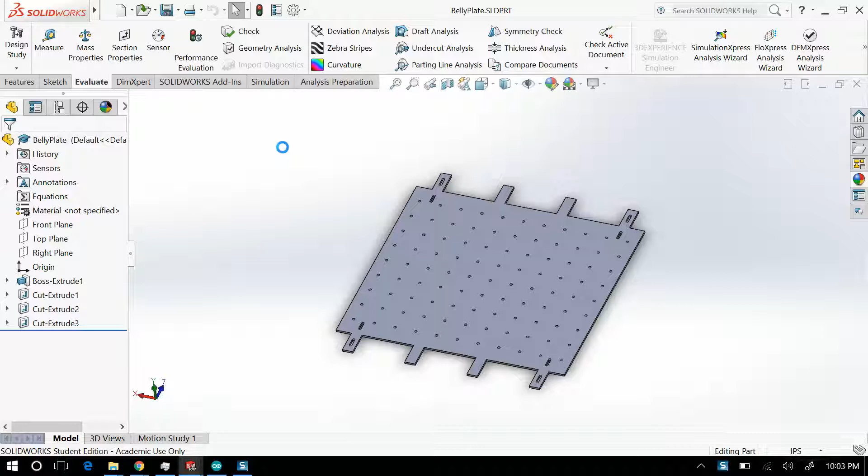Okay, so I'm going to go through this a lot quicker than I've done before, so you can just take a look at the dimensions you need. If I go to my main assembly, you can see here is my robot that we want it to kind of look like at the end of the day. There will be other pieces put on the robot, but that will be much later.

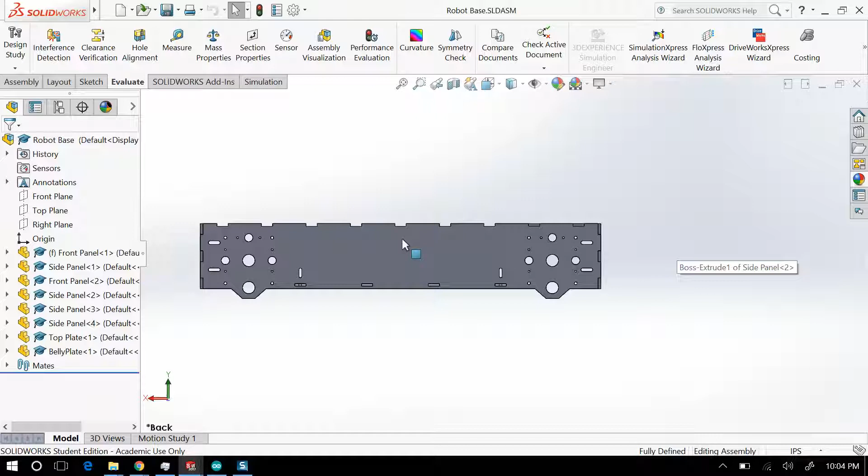So let's get to making the belly plate as well as finishing off the side plate. You'll notice there are a few extra holes on the side plate that I need to put on, as well as some of these holes for the belly plate.

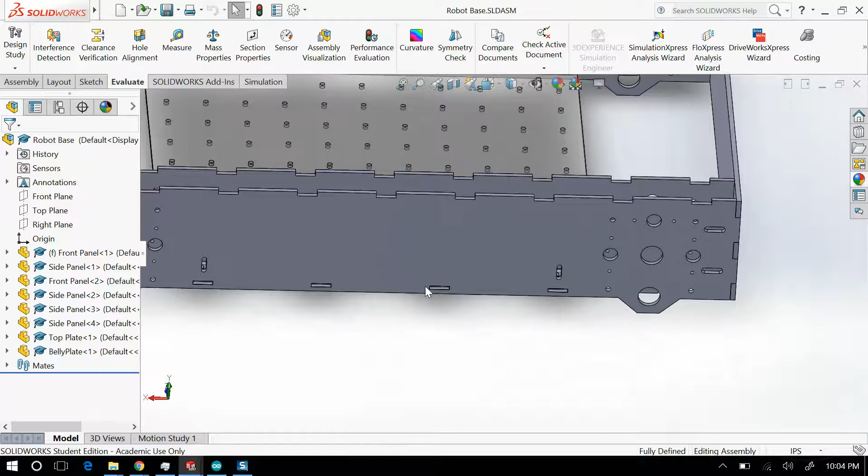Okay, if I take a look here, you can adjust this to be the way you want it to be if you need to, but you can see that I've created slots along the bottom of my robot to put my belly plate in, as well as slots for my L brackets after putting the belly plate in. So let's get to making these slots.

So I'm going to go into this part here, and there are two things that are different with this side plate now. One is the addition of these slots for the belly plate, as well as these slots for the L brackets, but also you can see there are these sets of 4 holes on each side, and these are for churros to hold our gearbox together and make it sound a little bit nicer. Previous iterations of this robot in other classes made it sound like a pile of rocks, so we want ours to sound a little nicer than a bag of rocks.

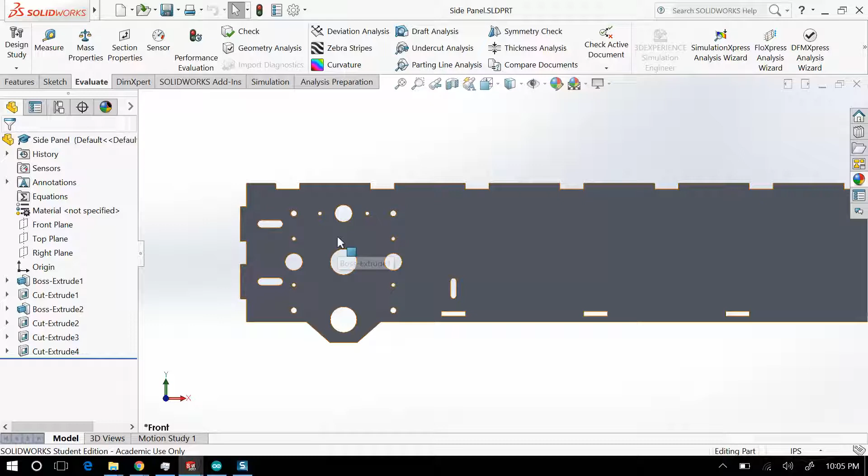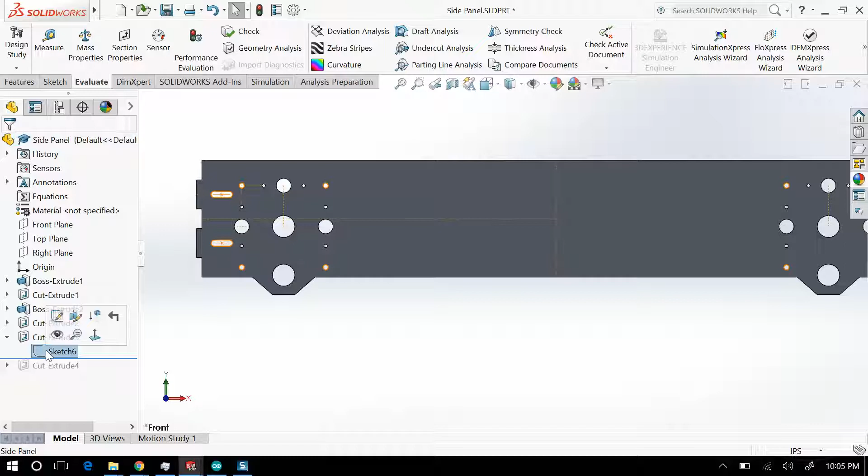So let me take a look at this extrusion here. What I'm going to do is go back here. Let's say this was your side plate before you made these extra cuts. I'm going to show you this cut that we made, and go into the sketch to give you an idea of how this sketch looks. Basically what I did is I created these 2 slots here that are right next to my teeth.

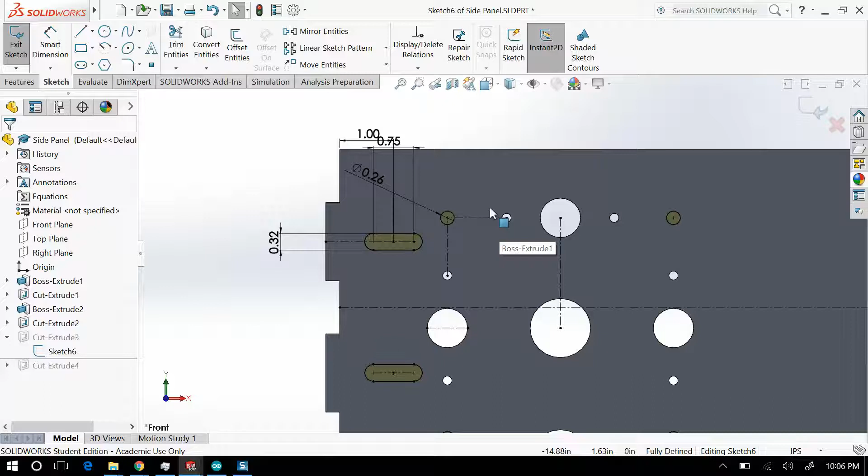I think you already had these. This is 1 inch away from the inner side here, 0.75 inches in width, as well as 0.32 inches in thickness. What you care about are these holes here, and what I've done is I created a center line here and a center line right there for reflection, as well as a center line of these 2 lines that intersected to tell me where I'm going to put my churro.

So for instance, if I deleted these 2 lines here, delete 1, delete 2, you can see that I can move this hole all about, and all the other holes similarly move about with them.

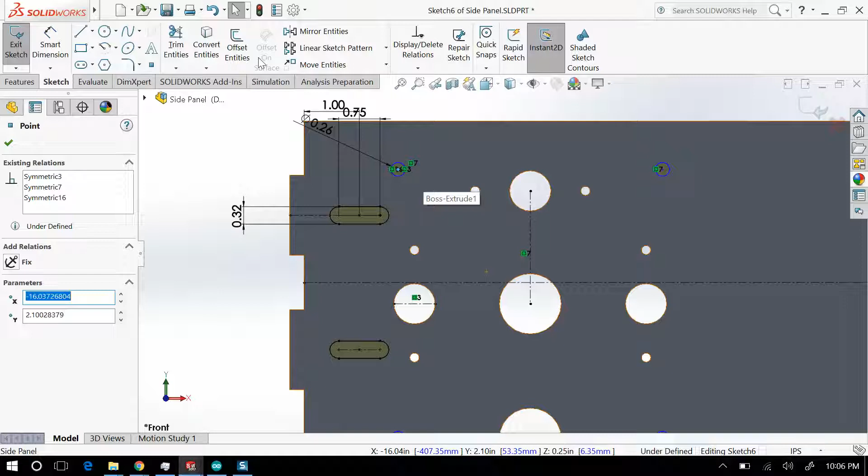So what I'm going to do is create a center line from this point outwards, make sure it's straight. I'll also create a center line from this point outwards, straight to there. Just for posterity, I'm going to bring this point back right there so it's locked on top of each other. Now you can see this point is exactly where the horizontal line from this hole and the vertical line from this hole meet, and that's where I'm going to put this churro hole.

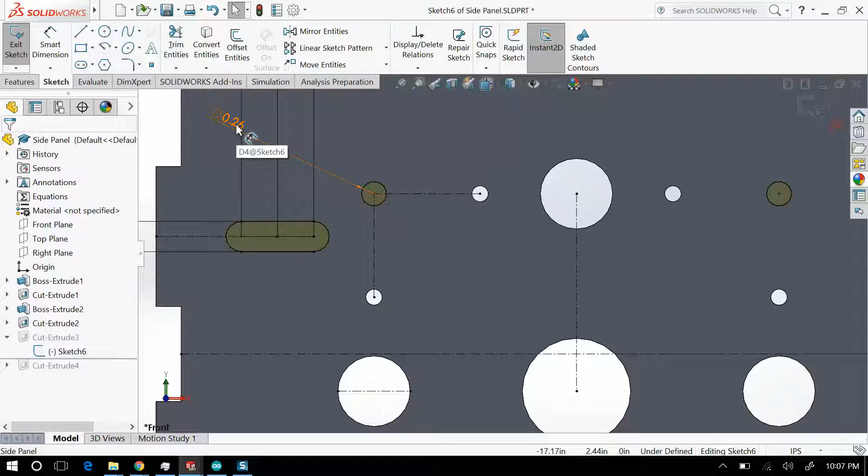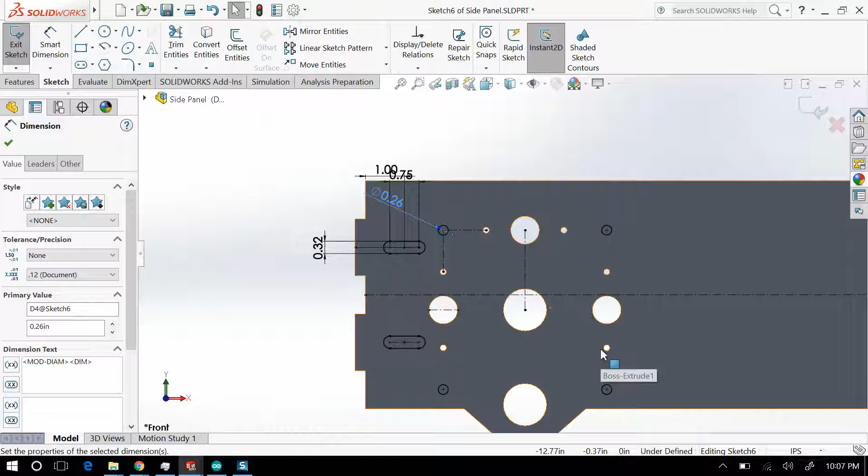This churro hole is exactly a quarter of an inch in diameter, and we're going to add an extra hundredth of an inch, so 0.26 inches in diameter. I then reflected across this line here, as well as this line here, to give me these 4 holes. Then I took all of these 4 holes and reflected across this line here, and so I've created these 4 churro holes.

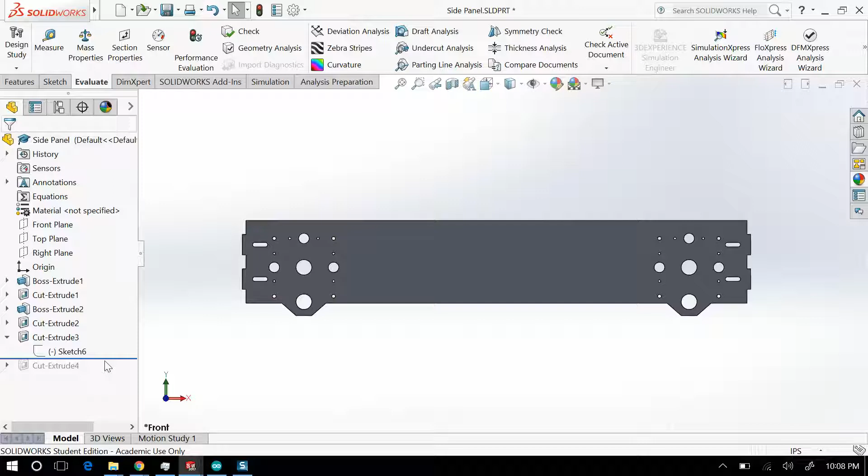So I'm just going to exit the sketch, and it will re-extrude them, and now you can see I've created these holes. Now, for the other holes, I'll go into the sketch for these ones and show you the dimensions.

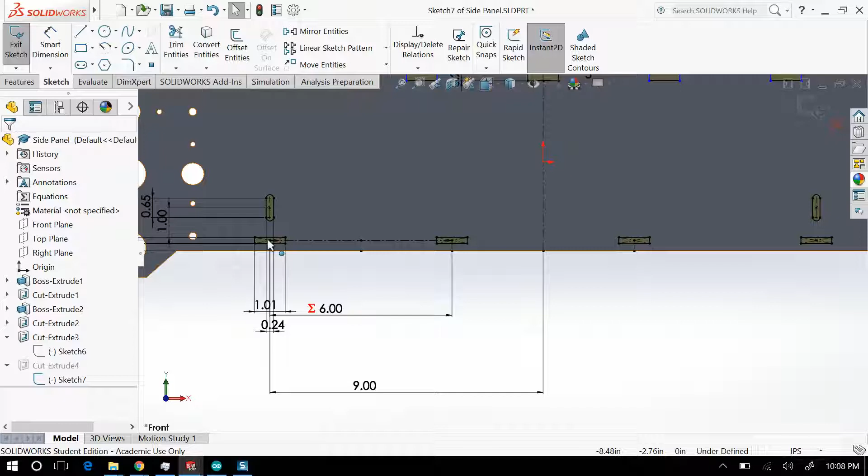What I did is I made this in the same sketch as the tabs on the top, or these slots on the top, and for the bottom I started one slot exactly 9 inches from the center line. I made it 1.01 inches wide and 5.2 millimeters thick, because we're going to be using 5 millimeter polycarb.

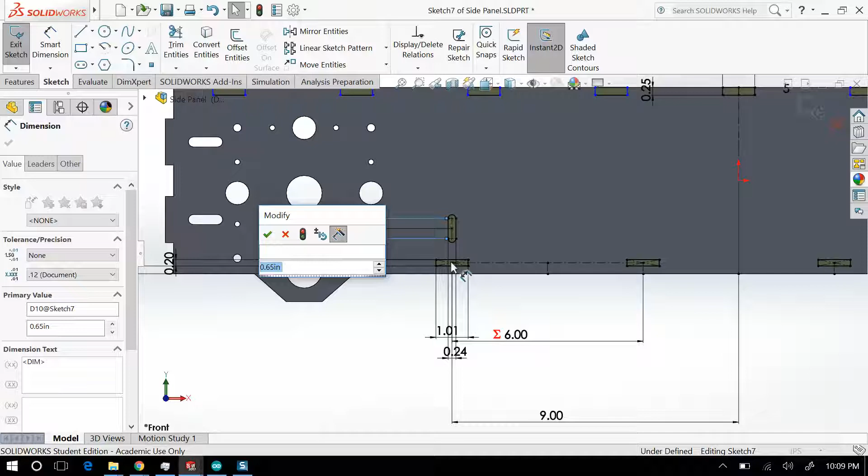And then I did a linear sketch pattern along this direction by 6 inches each. And then I also put a slot, just like I've done before, where I made it an inch away. That shouldn't be 0.65, that should be 0.75 inches, and I made it 6 millimeters across, or 0.24 inches across.

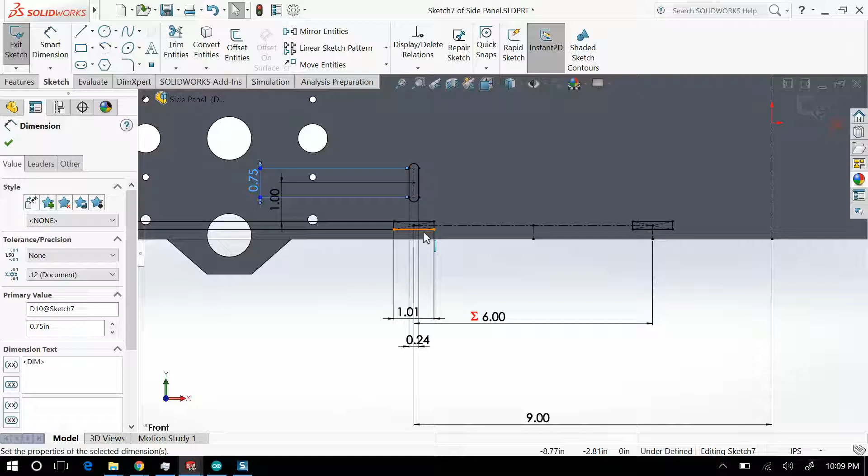And then I reflected it across this line. Notice how I'm not putting slots in the center area, so that I can leave more room for weight relief. Similarly, these slots here, I didn't put them right on the bottom because I want the ability for gravity to be fought by the thickness of this metal here. So I gave an extra quarter inch from the bottom to where my rectangle begins.

Okay, so those are the dimensions that you have to care about. So I'm just going to click OK with that and exit the sketch. And so this is my side plate.

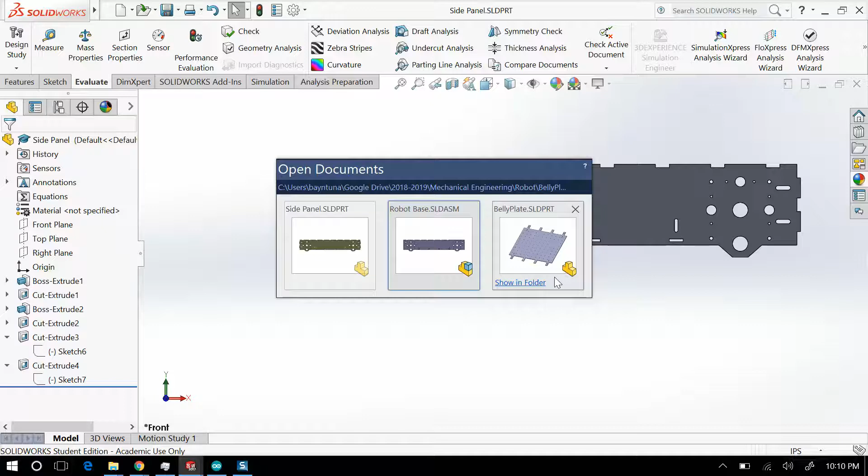All right, I'm going to go on to the belly plate. So we can go ahead and create a new file if you haven't already, or if you have created a belly plate, open it up, and I'm going to just kind of start at the beginning.

The beginning of the belly plate that I started with, again, you can make this whatever you want, but I made it 24 inches wide. The reason is that is the total width of our robot, which is 2 feet wide. I made it 22 inches in length, and you'll see why later. You could make it longer, but you're going to have to put some extra cutouts for other purposes later on. So let me move forward.

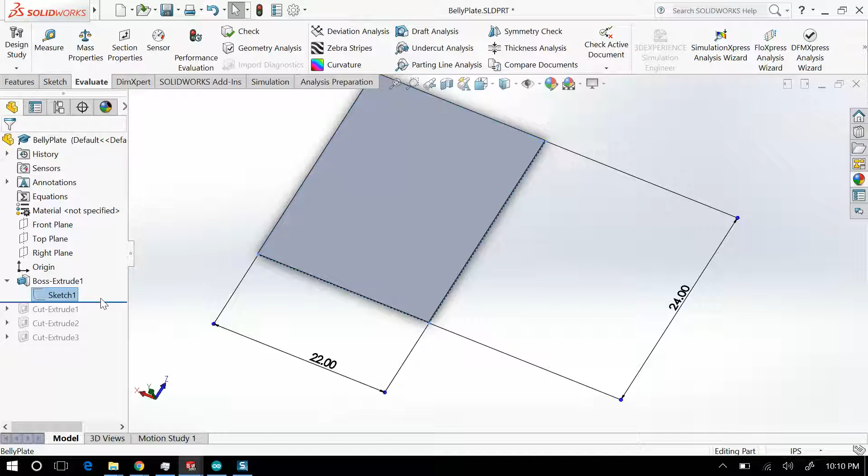After I made this rectangle, I extruded it by 5 millimeters. So that's over here, it says 0.20 inches, but it's really just 5 millimeters.

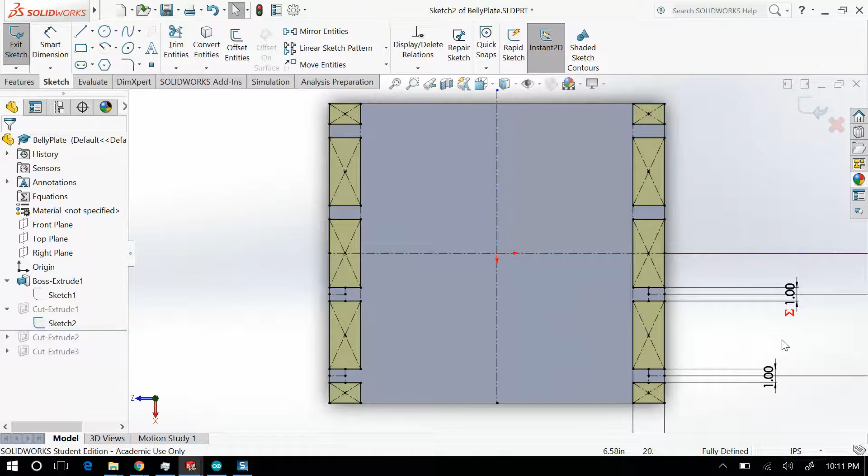Let me roll this forward. Then what I did is I made cutouts to create these little tabs that came out. Let me give you an explanation on the size of these tabs. The width of these tabs is exactly 1 inch.

And the width between the tabs, essentially I made boxes, and I didn't really care about the size of the boxes. I just made sure that the width of the tabs were 1 inch, and the distance between the center and the last tab was 9 inches. That's what we had before, and the distance between the center and this middle tab here is 3 inches. That's what I did here.

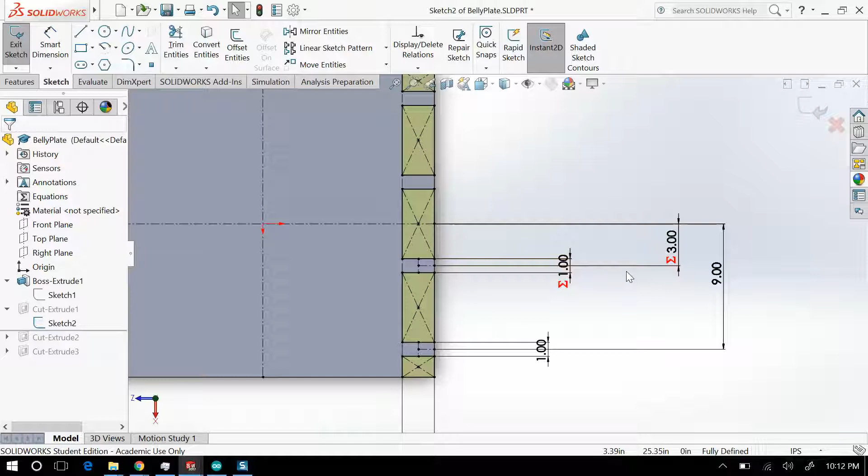But you can do this in whatever way you want if you go back to your previous sketch of the distance between those slots that you created. And then I just basically mirrored all of this through these two center lines here and here, and that's what created my extruded cut here.

So the depth of the tabs is 2.25 inches. The width of them is 1 inch, and this distance here to here, if I remember correctly, I think it's 6 inches between each tab.

6 inches between each tab, and 3 inches from the center of the plate to the center of this tab, and 9 inches from the center of this plate to the center of this tab. So you can define it however you want, as long as you make sure you get these dimensions right on your actual robot.

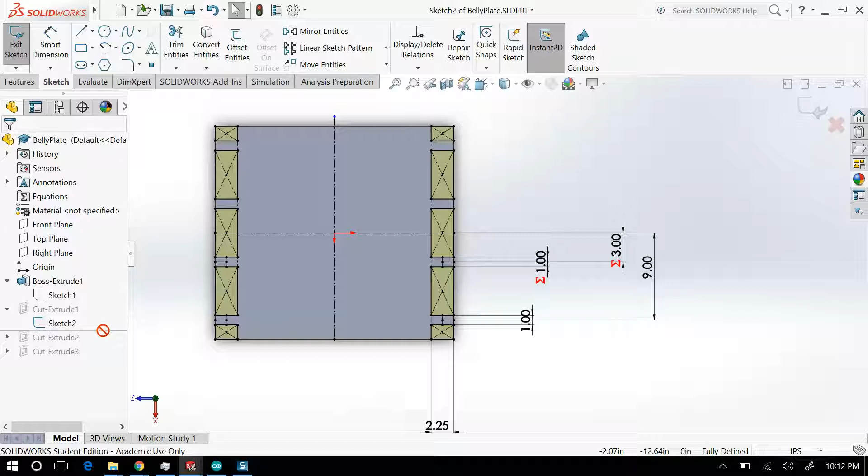Okay, so I'm going to now roll this forward a little bit more. I'm going to exit the sketch, and roll it forward to my next cut extrude. My next cut extrude are just these little slots here.

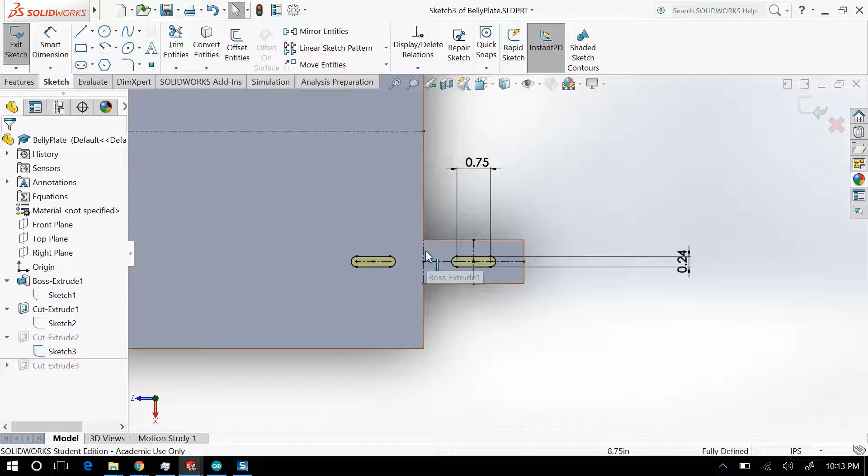Again, as I always do, these are 0.75 and 6.2 millimeters in width. The difference here is that I made this slot perfectly centered on the tab instead, as well as then reflected it across the center line here. And then I did another reflection across this line for that tab, and did all of these tabs and reflected across this line for the tabs up here.

Okay, so you can copy these tabs and put them into your extrusion.

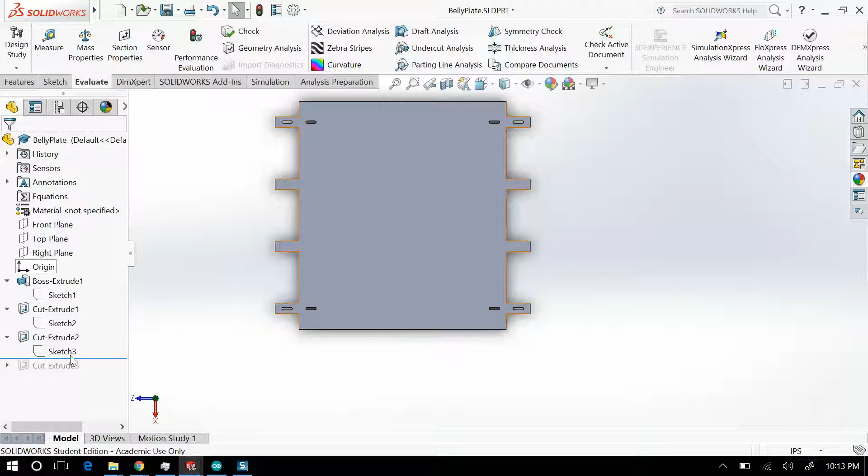Finally, what we need is a bolt pattern in order to actually put things into this plate. This can be made of anything really, it can be made of aluminum if you want, but I like to make it out of polycarb just because it looks a little bit nicer.

And so I'm going to go into this sketch and show you how I did that. This is probably the simplest thing you could do. I basically created a 6.2 millimeter hole right here, smack dab in the center. I used two center lines to find out where the center is.

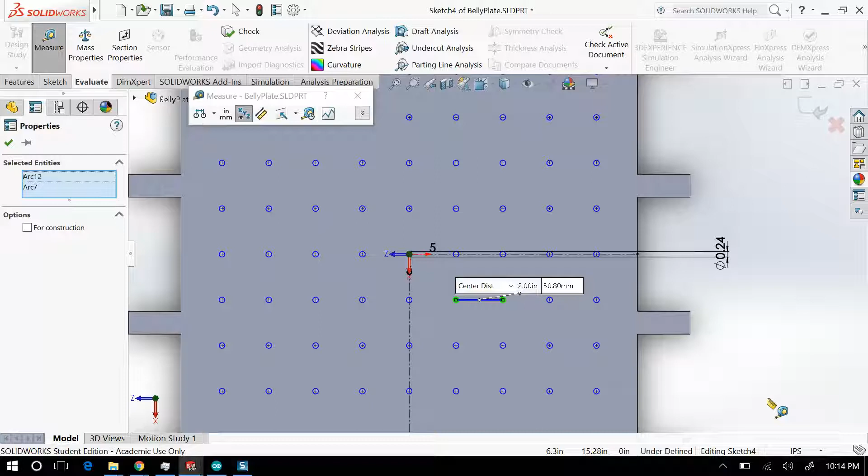All I did is a linear sketch pattern in this direction, and in the down-right direction, then a reflection across this line and a reflection across this line. If you take a look, I'll show you the measurement between each hole - in my case it's 2 inches. You can make it 1 inch, but I'd prefer 2 inches because you don't really need a 1 inch hole bolt pattern, that's probably too much. If you already made a 1 inch pattern and want to change it, go ahead. If not, it's probably okay, as long as you make this out of polycarb, because the cut won't take too long. Okay, so that's it.

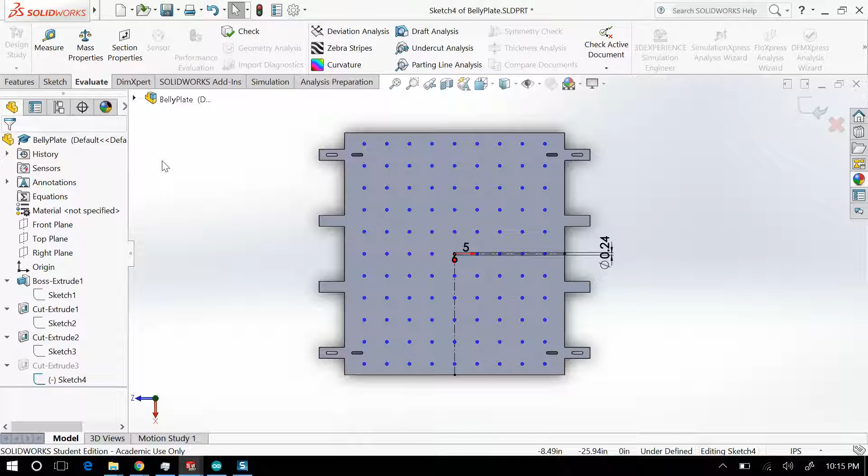That's it for the belly plate. Once you import this into your main assembly, you'll basically have a fully functioning robot that kind of looks like mine. Over here, hopefully yours looks a lot better than this.

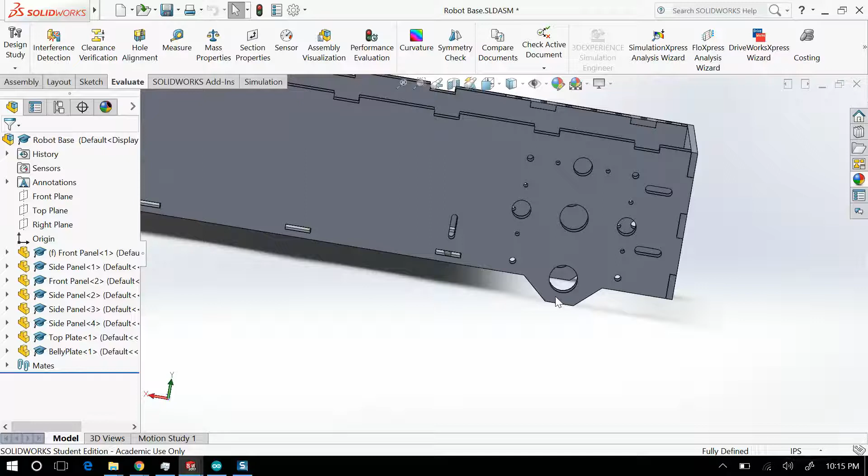There's a couple of aesthetically pleasing things I'd like you to try and do. The first thing is to fillet the edges - there's a few edges of this robot that could use some filleting. For instance, this piece here, let me open this part. This piece could certainly use some filleting on this corner, this corner, this corner, this corner.

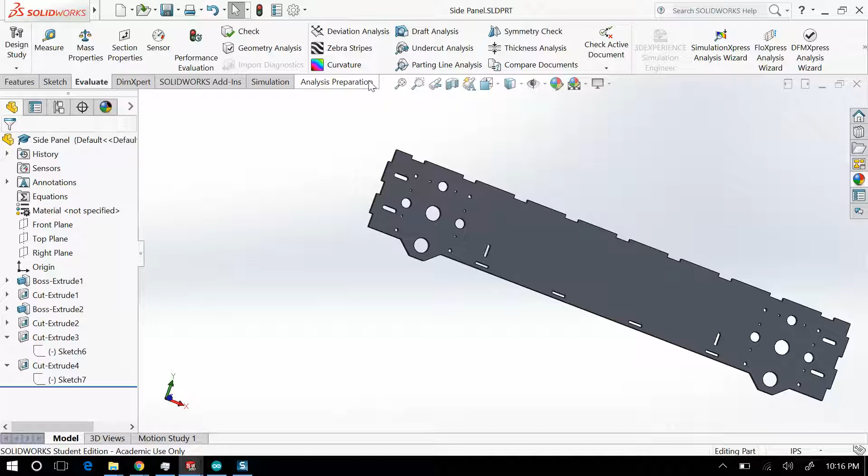What I'm going to do is go to Features, click on Fillet, then click on the part I want to fillet. I'm not going to move away after clicking it, because there's a bunch of things I can do. If I don't want to click on all of the corners that exist, I could click on one of these boxes. Unfortunately, clicking on any of these boxes is going to ruin your fillet, or your robot part, because it's filleting way too many corners. You don't want to actually fillet this many corners.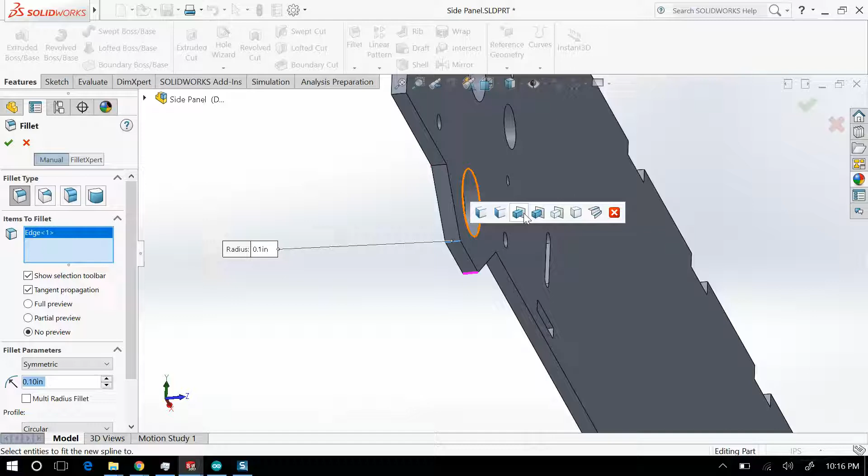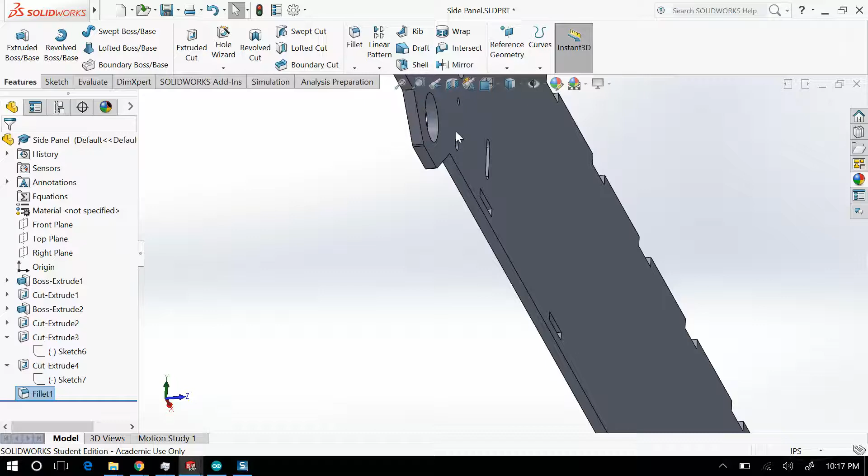What I want to do is make the fillets just internal to this particular feature, which is just this extruded portion here. If I press this again and select internal to feature, you'll see I only have 4 parts that are going to be filleted. So I'm just going to click that. My fillet radius, usually 2 millimeters, is probably good enough. I'll just press enter, and you can see it's created these nice rounded little edges.

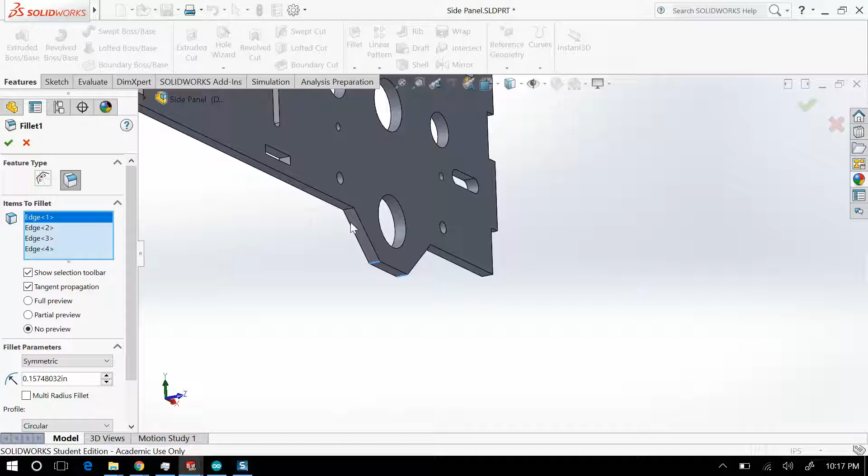If I want to, I can make it look really nice and edit the feature here, maybe change it to like 4 millimeters. And so now this has created a nice little portion here. I could have also edited the feature and clicked on this as well.

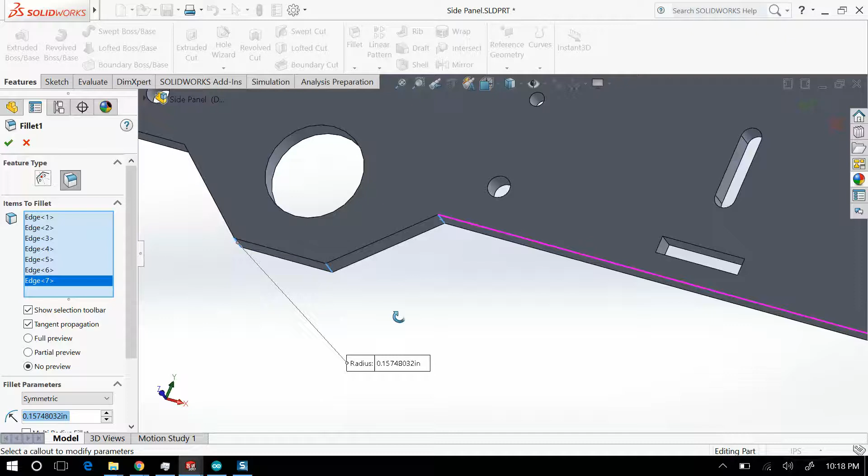Oh, this goes crazy - not connected to start face, connected to start loop. Nope, nope. Oh, concave - no, I don't want all concave either. I can just click on a few extra, click on that one as well, click on that one as well, and click on that one as well.

What I'm going to do is make this even nicer - I'm going to make this like 6 millimeters, 6 millimeter radius. You can see it's created these nice little rounded edges on here, and this is something you're not necessarily going to cut yourself on.

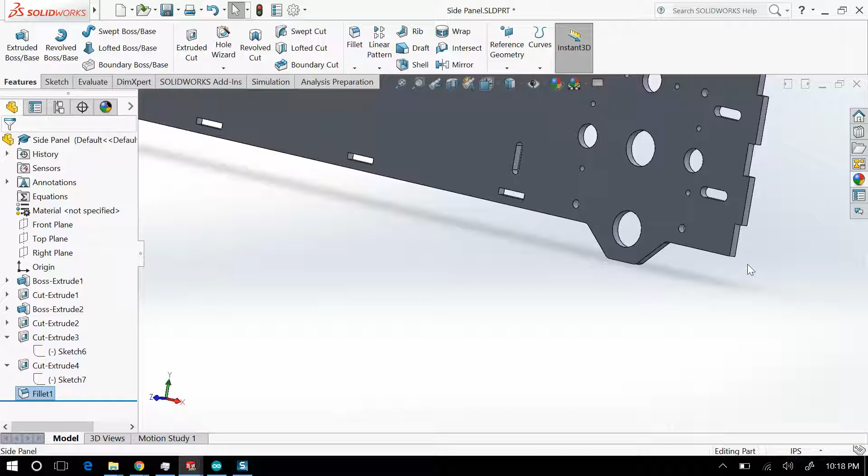You can also do a fillet on these tabs, but you can't do fillets internal to the tab. So if I wanted to do that, I could click on fillet. This is kind of a nice way to keep yourself from cutting yourself when you actually create this. So I don't want it connected to start face, and I don't want it connected to start loop. What I do want, though...

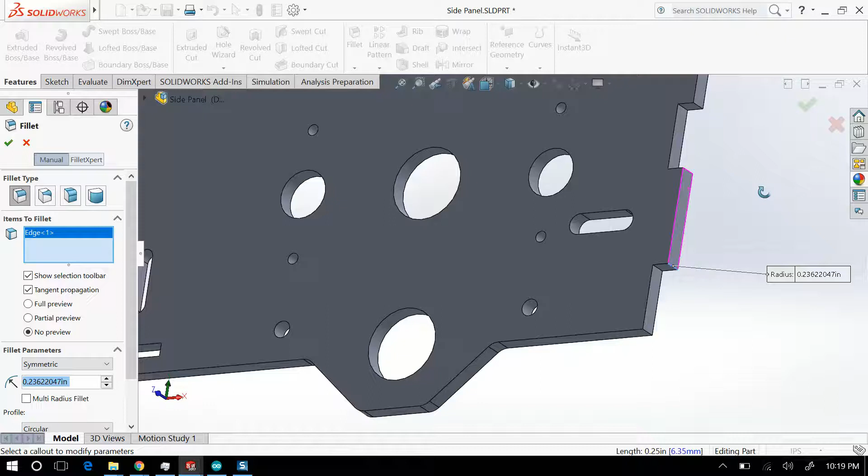Maybe I'll click on the next one. Hopefully it will tell me I want all convex. No, not all. No, not connected. Left feature, right feature. Nope, unfortunately it does not give me the option to do that.

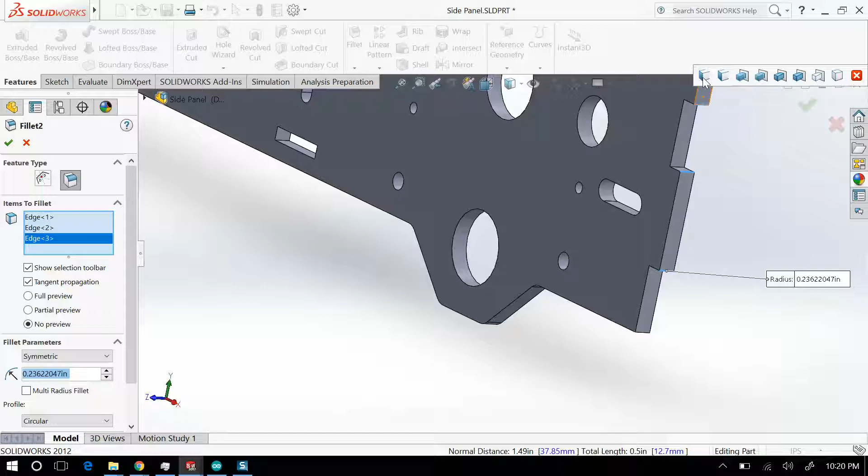I'm going to go back and click on this fillet, edit the feature, and hopefully click on another one, and it will allow me. It's just not allowing me to get any of the extra things.

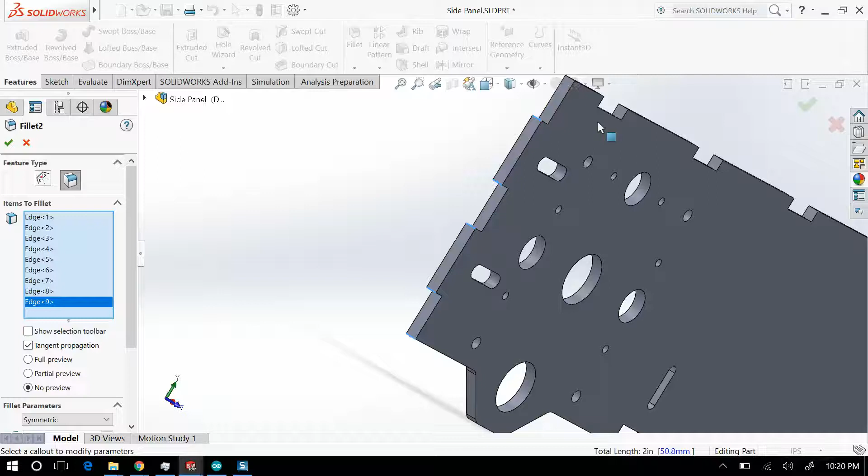So if I want to keep myself from cutting myself on things, I can fillet basically all of the convex edges - 1, 2, 3, 4, just keep going all along the top here, including these pieces up here. It gets really annoying, but it becomes worth it once you end up cutting this material. Otherwise you get really, really sharp corners, and you'll have to manually fillet them yourself, which takes on the order of about a half an hour per piece. Since you're going to have several of these pieces, you really don't want to do that - you really want the water jet cutter to do it for you.

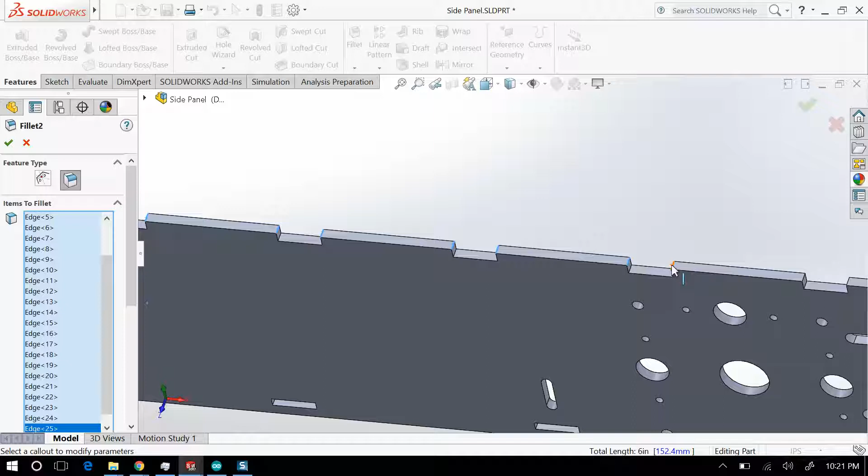So I'm just going to fillet, fillet, fillet. I think I've got them all. Oh, I don't have this bottom one here.

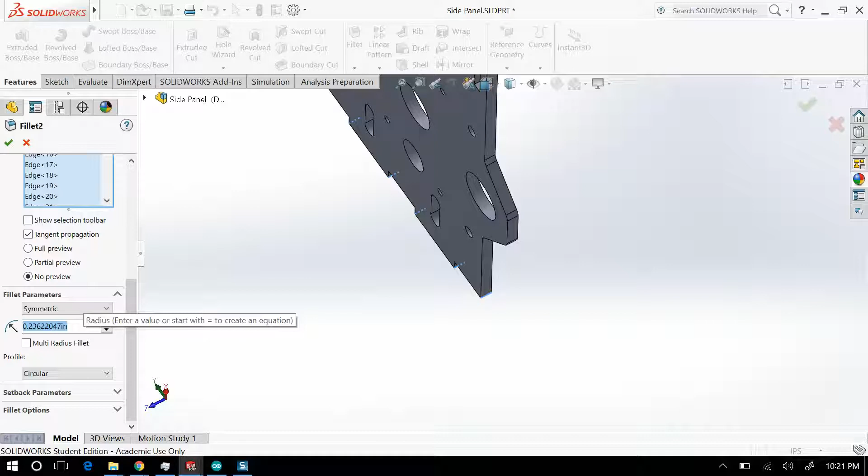And done. I filleted them way too much, so I'm going to change them to probably about 2 millimeters. You can see that I've basically made these nice rounded edges all across the top. That has made my robot way less sharp than it used to be.

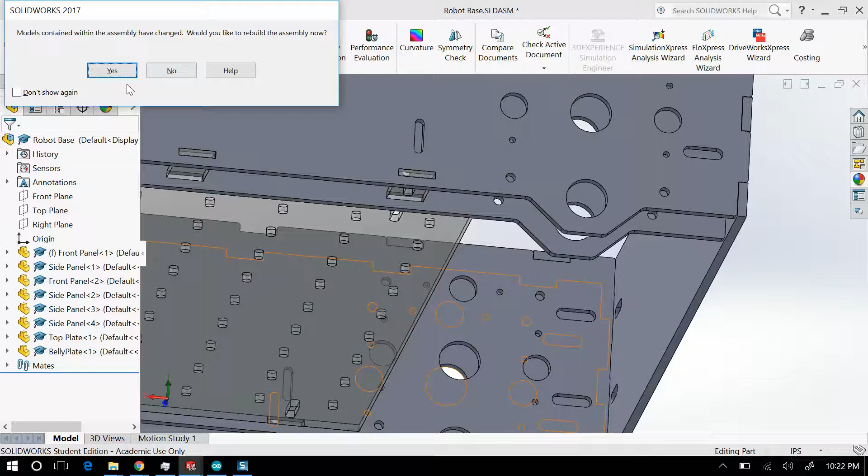So what I'm going to do next is show you how to make some relatively good looking weight relief. So I'm going to go back to my robot base, and I'm going to go to my front panel. And the reason why I'm doing that is because I have a little bit more space to work with on my front plate, and I don't have as much interference, as well as the fact that I need to also fillet my front plate. So let me go there.

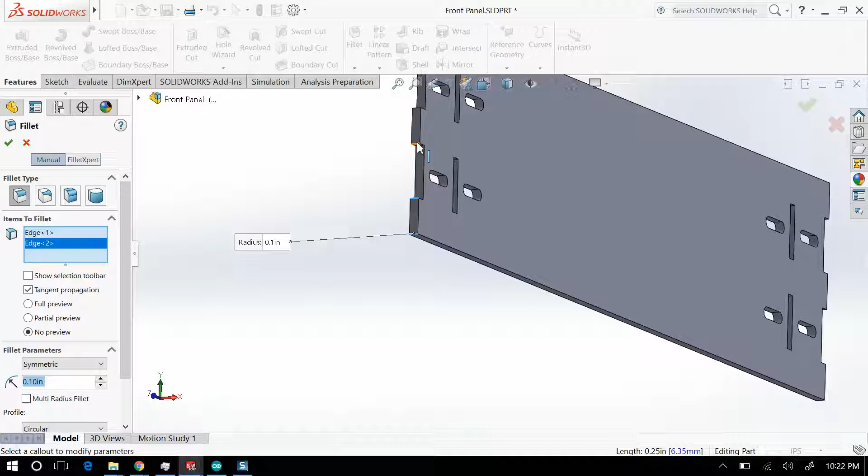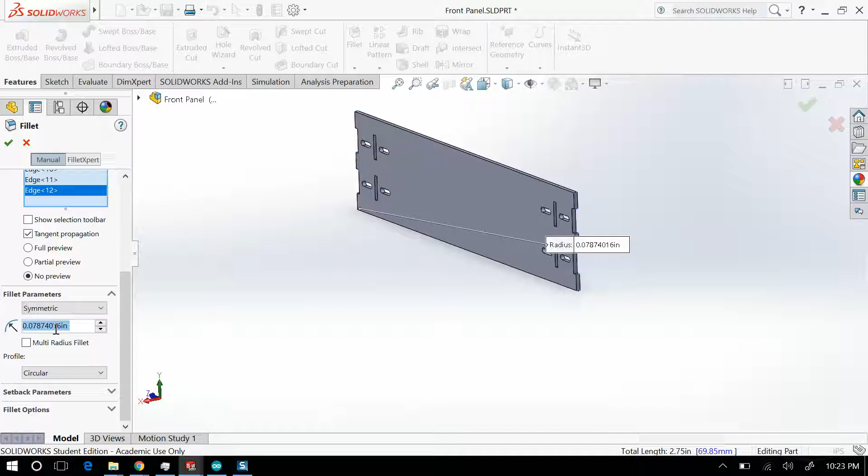Almost done. If you accidentally click on something, you can just click on it again and it will deselect it. Alright, and that is good. And I'm just going to change that to 2 millimeters as well. Okay, good. And so there is my fillet.

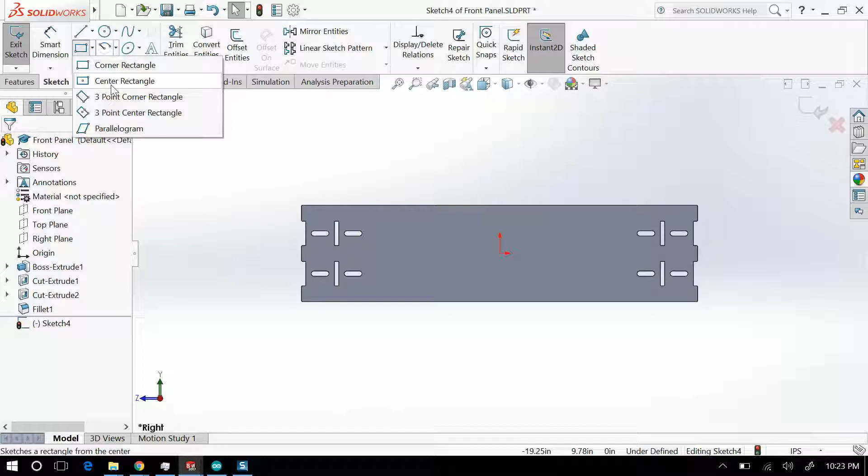Now, what I'm going to do is just show you some basic weight relief. Now, if you are the most uninspired artist in the world, such as myself, then what you can do is simply just make triangles. And because of my love for symmetry, I like triangles which are relatively symmetric. So I'm going to just create a center rectangle. I'll worry about its dimensions later,

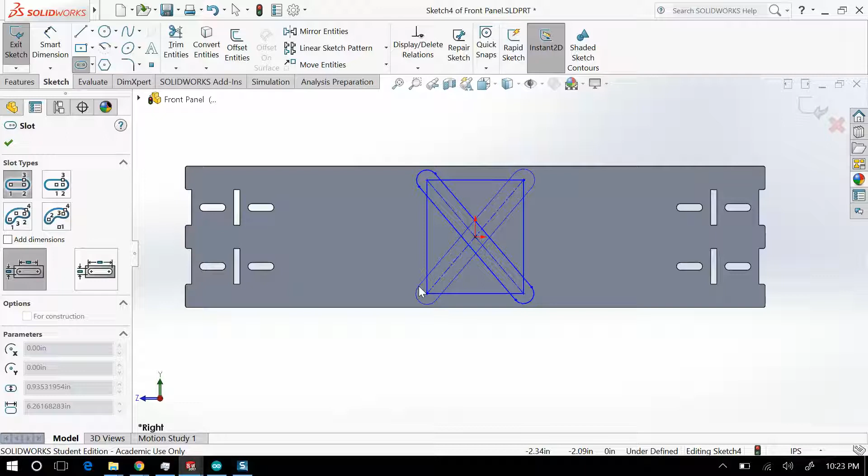and I'm just going to make a couple of slots. I'll make another slot here. And you can see that I've now created 4 triangles just from this one box. And then I can similarly make a linear sketch pattern of this, so maybe I want 3 across. And you can do all other sorts of patterns that you want on this for weight relief. Obviously you don't want it to be so much weight relief that the whole robot's going to crumple.

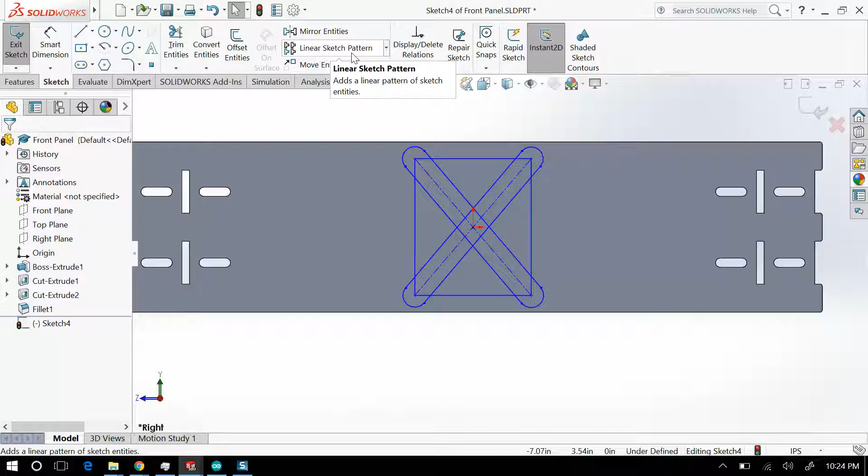But you can see that I can do either mirror entities or linear sketch pattern. I'll just do a really boring linear sketch pattern where, let me select all of this first, linear sketch pattern, and we will make it like 10 inches or so. Oh, that's too much. Maybe like 7 inches. 5. That looks pretty good. I'm going to press OK to that.

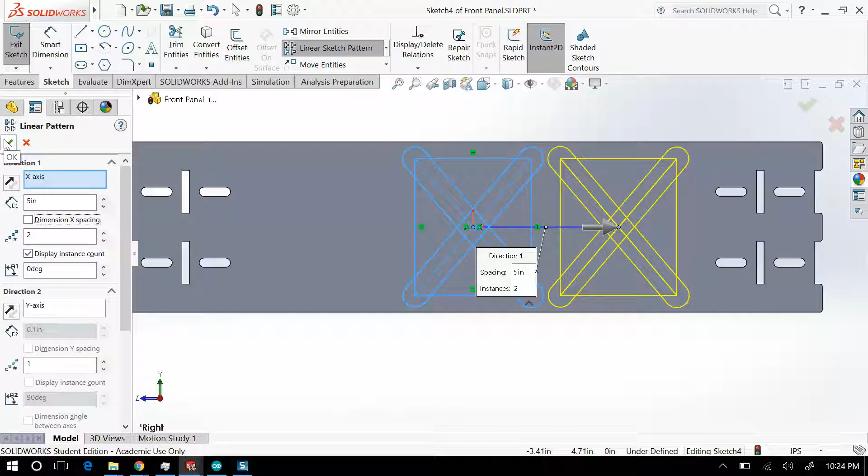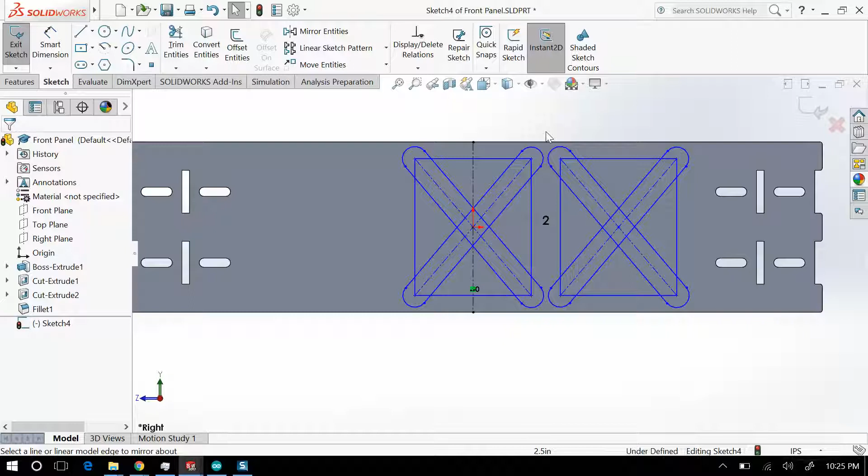And then I'm going to make a center line and reflect it. Take this and reflect it about this line here. Oops. Okay, and so now you see that I've created these triangles. I can do a lot of really nice things by smart dimensioning. So for instance, I can smart dimension this to that, and I can say that is ½ an inch, so 0.5 inches.

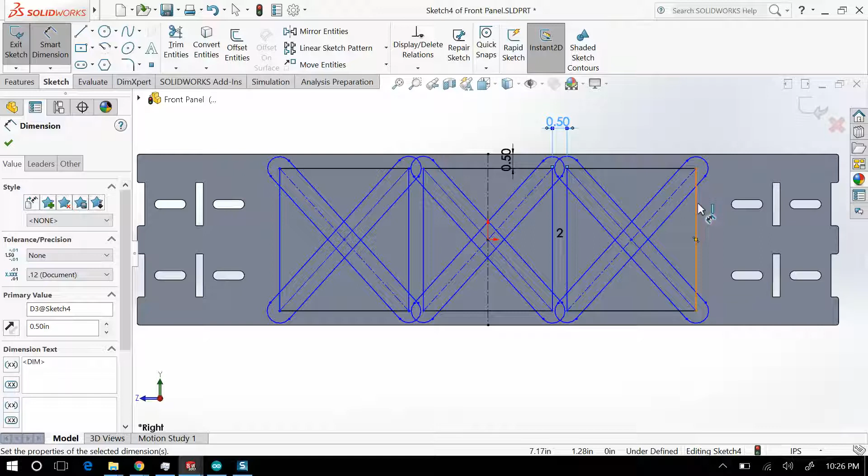Right. And then I can also smart dimension these two together and make them the same thing. So say this is 0.5 inches. Right? So that has now created this kind of nice symmetry. Finally, if I really want to, I can change the size of this whole thing and make sure that it's away by a very specific amount. So I can go from here to there and say that that is 0.5 inches. And you can see that it has automatically readjusted all of the parts.

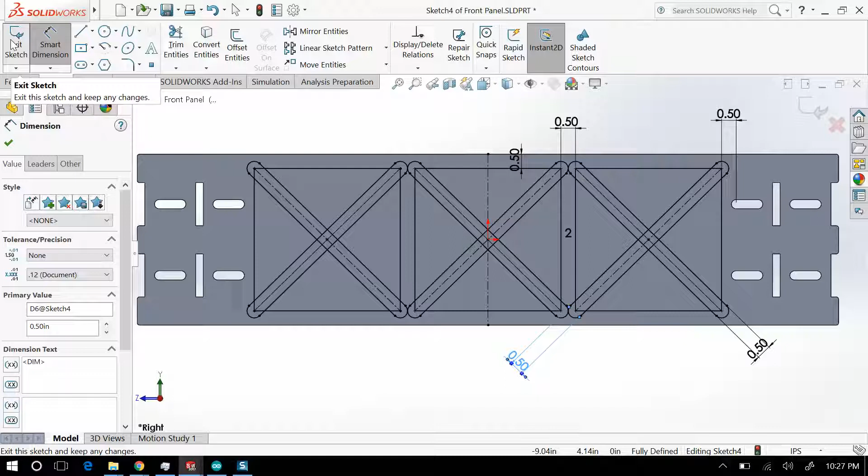Now finally I can be even more clever and make these, oops, I can make these tabs defined as well, which would be 0.5 inches. And then finally at least this one here, make this 0.5 inches. So now you can see that I'm going to unsmart dimension this, I'm going to exit this sketch, and now

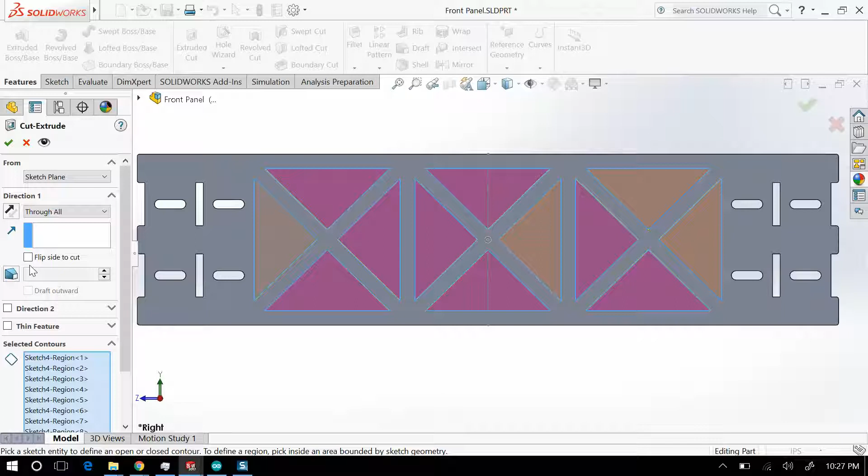if I want to extrude and cut this, I'm not going to do the whole sketch as my contour. I'm just going to click out these areas. And then I'm going to do through all, and we're just going to press OK on that. And now you've got a pretty standard weight relief. That looks okay. The last thing that you want to do here is make it look a little bit nicer.

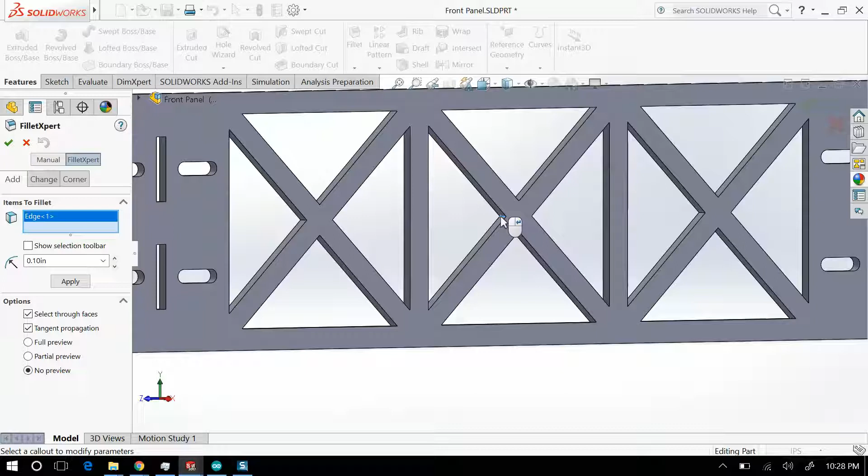You can see here that I have these really sharp corners, and so I can make some really, really generous fillets internal to this feature. Manual. Fillet, items to fillet. Show selection toolbar. There we go. That's what I want. And I just want to do connected to start internal loops. There we go.

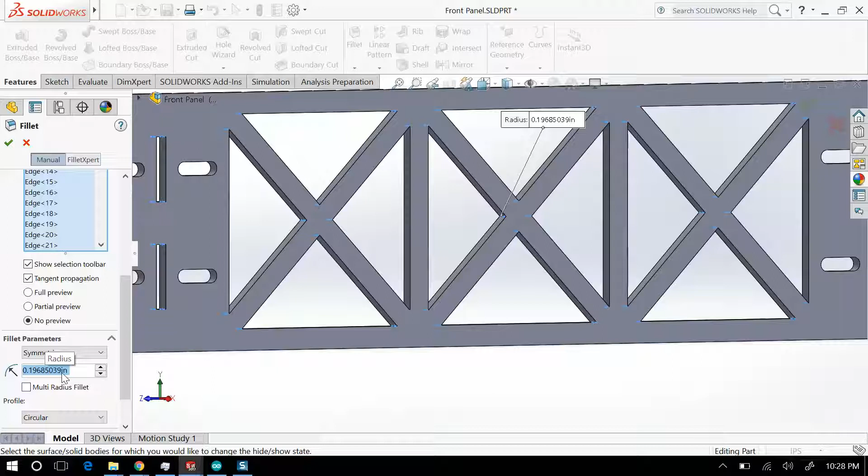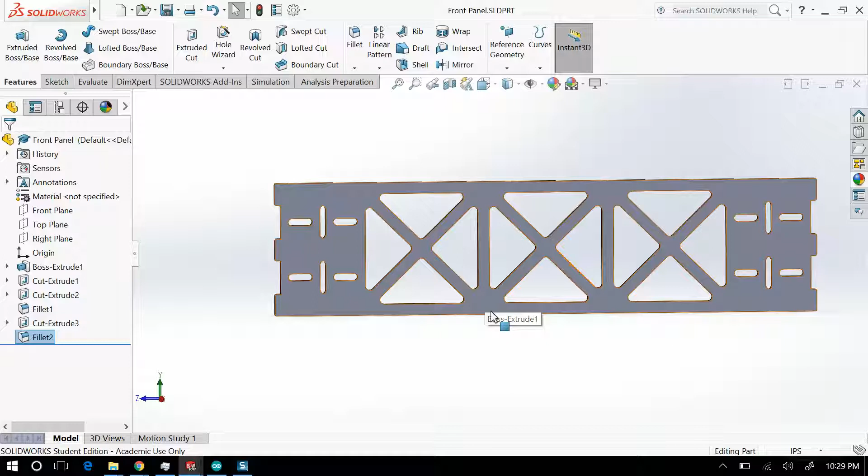That, and we're going to make this very generous and make it 5 millimeters instead. And now it's made this really nice looking weight relief, in which also your offcuts are not going to be cutting you to pieces effectively. Okay, so that is a basic tutorial on the last pieces of the robot, as well as some basic weight relief. Again, you can choose whatever weight relief you want to do. This is my particular favorite because I have very little creativity when it comes to artistry.